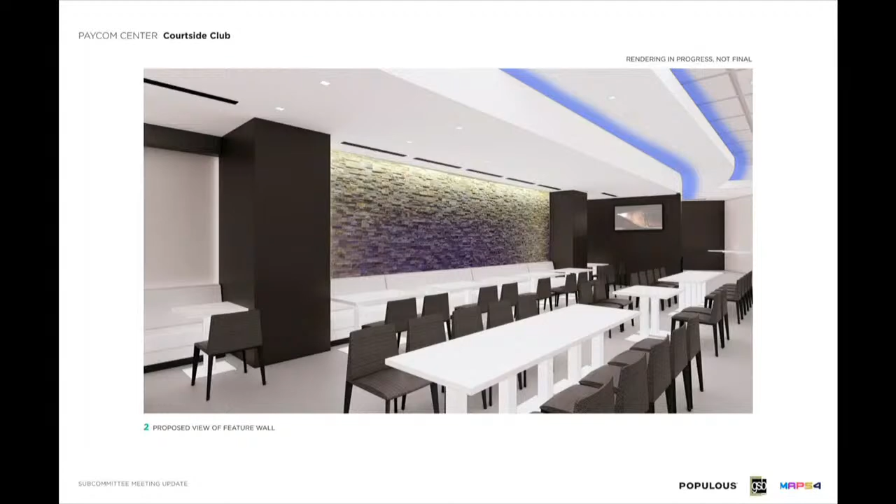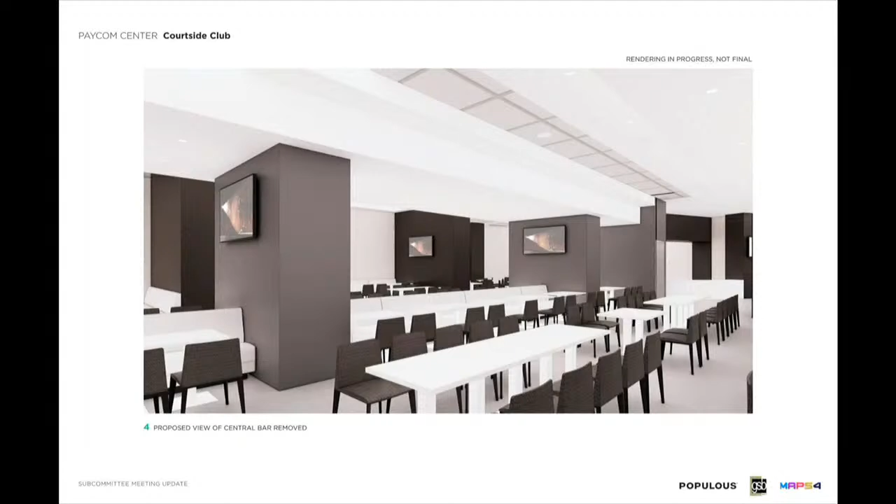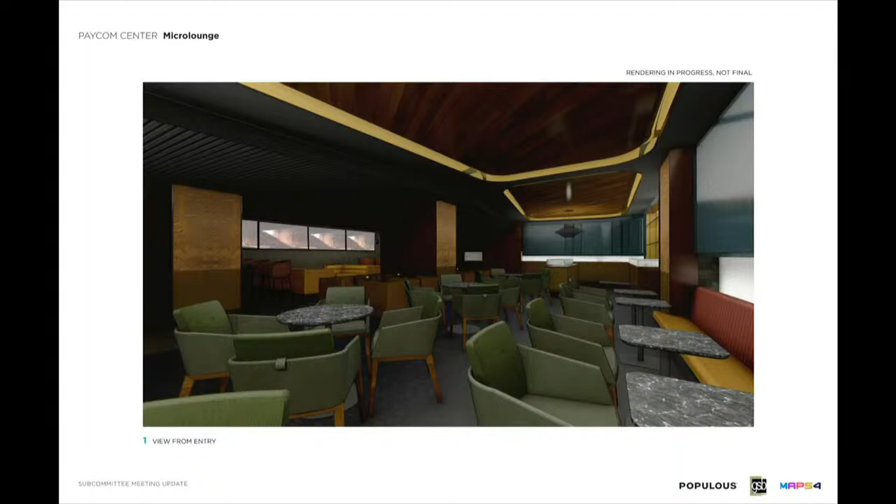This is a quick view of what the micro lounge could be. This is that founder's lounge we're converting into kind of a quieter, little more set-the-mood type space. This will be a very unique space, something they don't have anywhere in the arena today, a smaller premium club offering more opportunities for people to go have a drink before and after the game.

So a couple of views of that space, looking to use more higher end finishes, a little bit more wood and textures and darker colors.

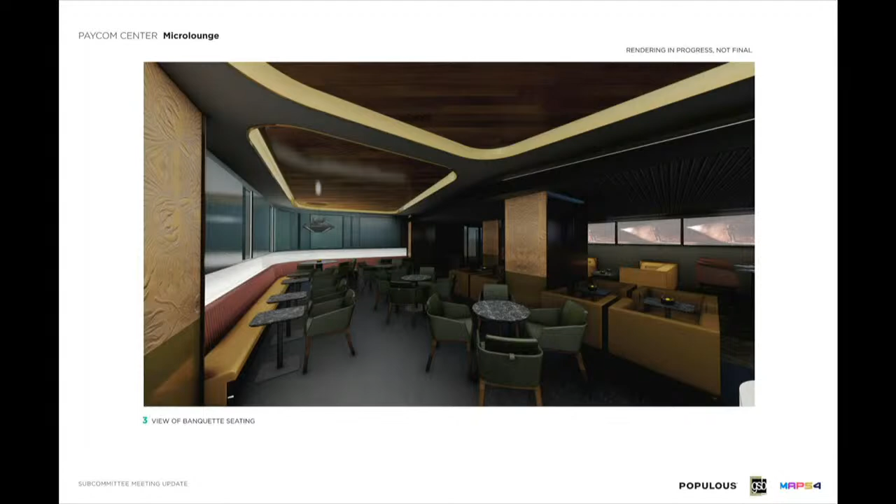And then the South Terrace Club, this is up on the club level where you're standing in the concourse with this view. You can see those glass panels on the left, and the idea was to try to really open up this space by taking those out and putting in some new flooring and new furniture.

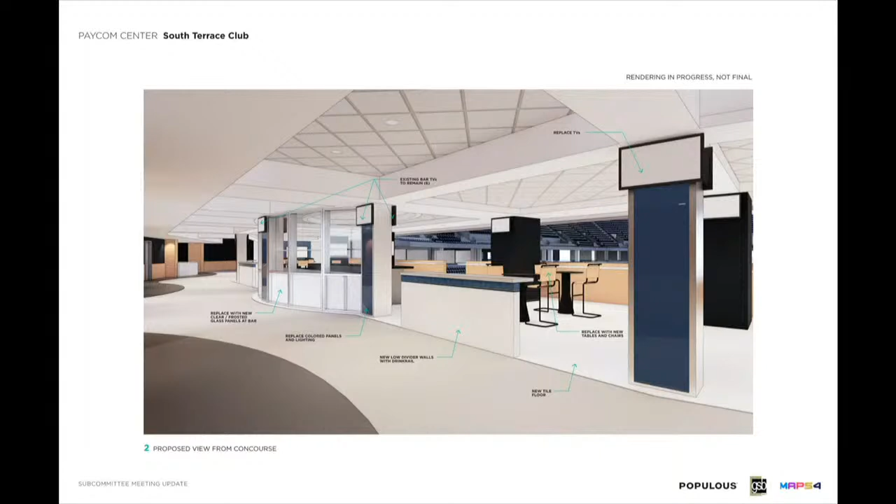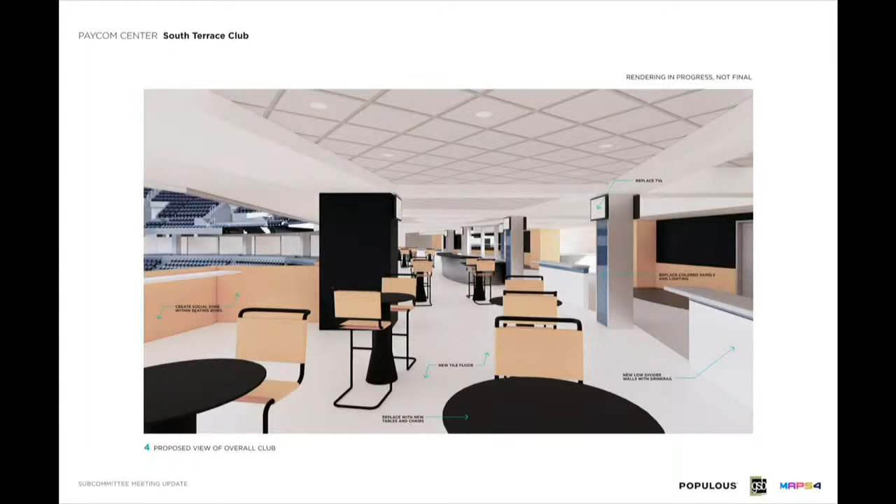Today the bar is on your left and the seating is in that space. We're not looking to touch any of that, just tile changes and some flooring and furniture basically, so you get a much more open feel and gathering space for people to use when they're at the event.

And then this is a view of that crew lounge, going very unique with this space. The idea was to kind of theme it with a music theme when concerts and touring acts come into play, so they really have a small space they can get away to and hang out, maybe doing a little work with a laptop or gathering with a small group of people.

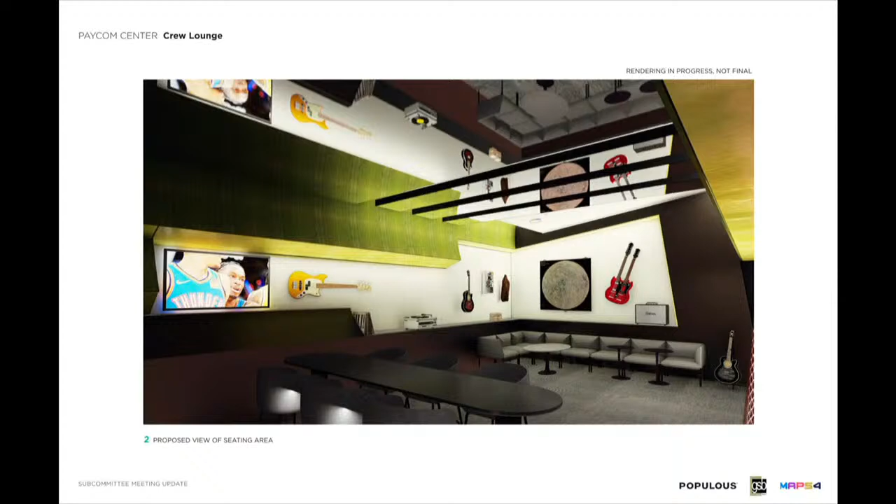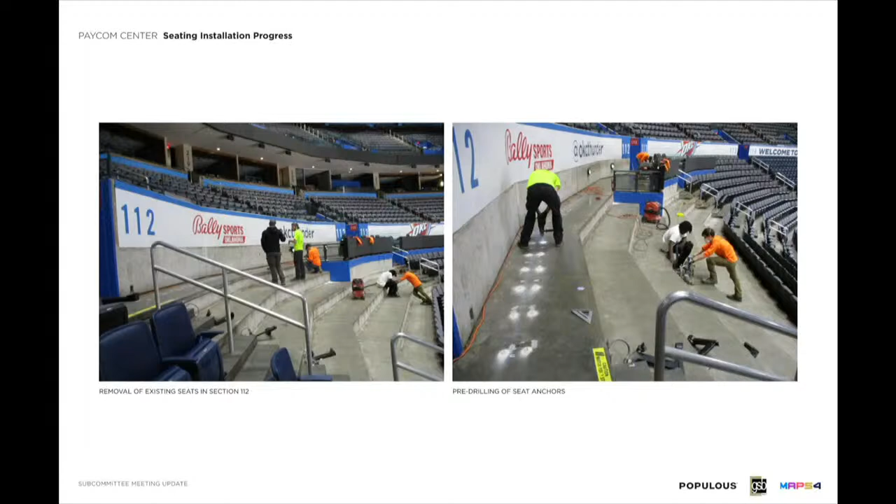They tear out the old seats one section at a time. They clean the space, and then guys come in and pre-drill the holes where the anchors will go for the new seats, and then they install them. So they can knock out quite a bit in a day or two when they have that freedom between events, and you start to get the new seats installed.

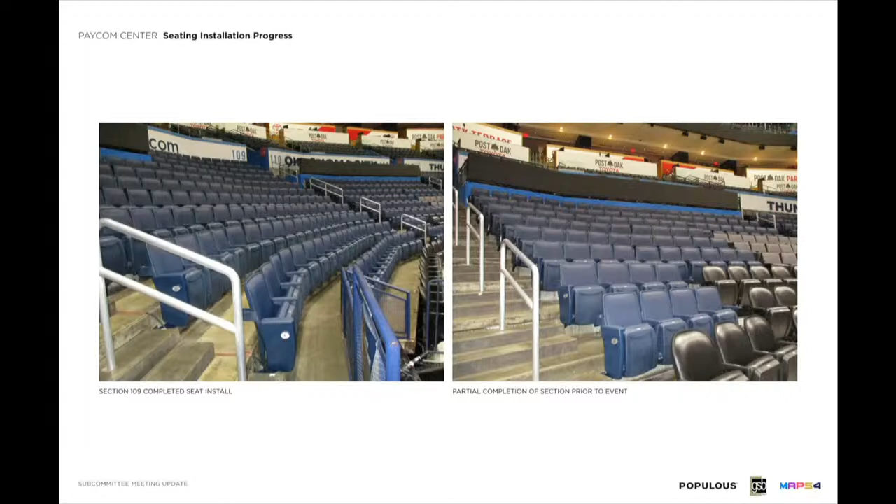If you look at the picture on the right, you'll even see a couple of different seat types there. The older seats off to the bottom right are on the retractables, then there's the gray seats in the far right, and then the new seats. So they've been really picking and choosing what they can get done in a short amount of time.

In addition to that, we have the elevator refurbishment of the 4 elevators. They're going to be replacing and fixing a lot of the components we've talked about before. One item was to air condition the shaft for one of those pairs, because it gets really cold in the winter in that shaft today, and really hot in the summer, so we've added a mechanical unit. That work got done early, so we put that in, and the elevators are scheduled to still arrive here in March or April to get that work going.

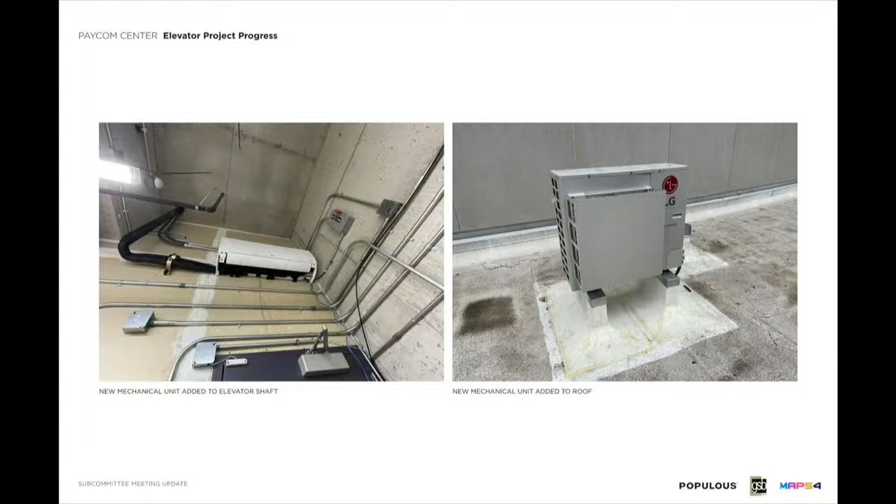One thing I'll hit on too is the scoreboard itself. The scoreboard work is scheduled for this summer, again after the season is done. Everything's tracking schedule-wise on that equipment, and we don't see any reason for it to not start when it's supposed to.

So that's my update until we go to the next item. Any questions? Kevin, Bob, do you have anything you'd like to add? Okay, great, thank you for that update.

Moving on to item 2D, recommend approval of change order number 1, MAPS 4 downtown arena phase 2A scoreboard replacement, with an increase of $120,443.85. I'll quickly walk through this with the new scoreboard, which is much larger than the existing scoreboard. We've talked about that before.

A couple of items have come up that we kind of knew would be coming down the road. We just needed to get the engineering done on the scoreboard itself to confirm a lot of this.

Item 1 is 12 new arena loudspeakers. These will be mounted below the new center hung scoreboard. I think there are 4 on the existing scoreboard today, so this will be much larger and need more speakers to provide more coverage for the space. That's an add of $67,000.

Item 2 is additional roof steel reinforcement up on the existing truss. This scoreboard is much larger and weighs more, and we knew the steel would need some upgrades to support the new weight. But we needed the scoreboard to be engineered and designed so we could get the final loads, and then go back in on the structural engineering side to determine what needs to be reinforced up there. That's an add of $243,000.